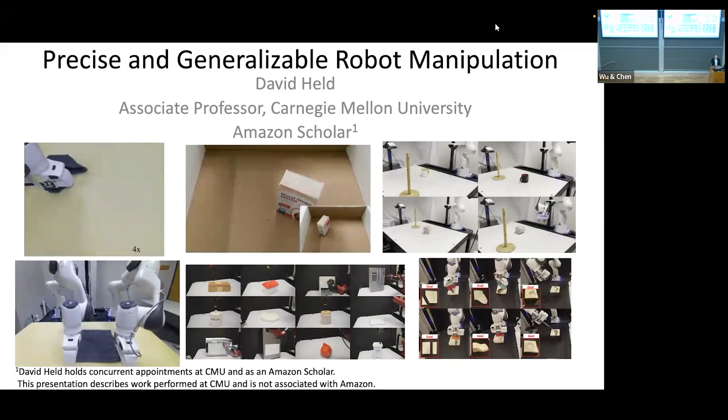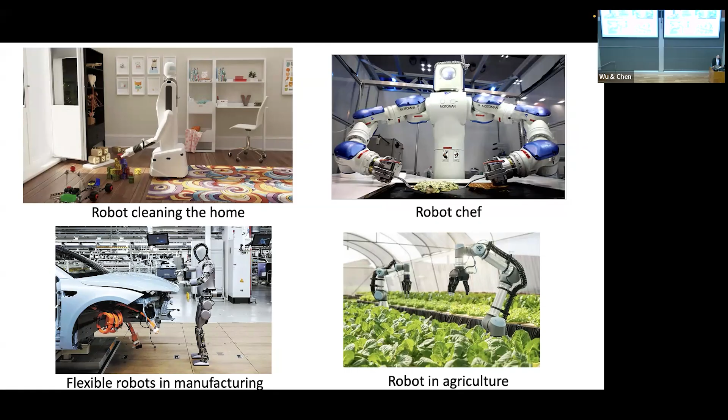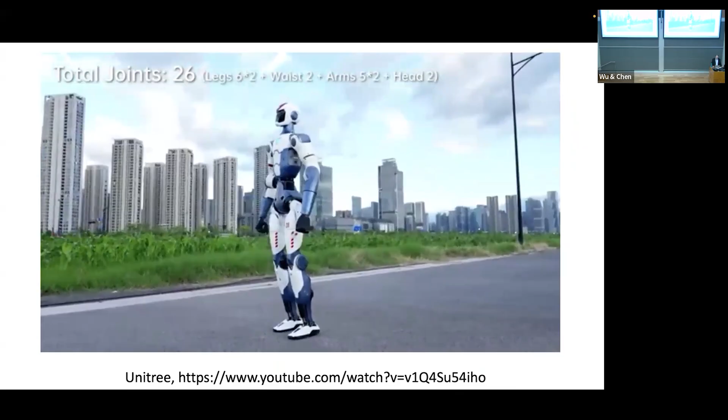As background, I guess many roboticists, probably many of you all, would like robots to one day work in our homes, cook food, do flexible manufacturing, adapt to new manufacturing tasks, work in agriculture, and many other complex settings. Now, if you look on social media or online, you can find many videos that look like this of robots doing super impressive acrobatics. And it makes it look like robotics is basically solved in some sense.

And you can actually buy one of these robots. And here's a video of someone who bought the robot. And look, it's already standing up and doing super cool things.

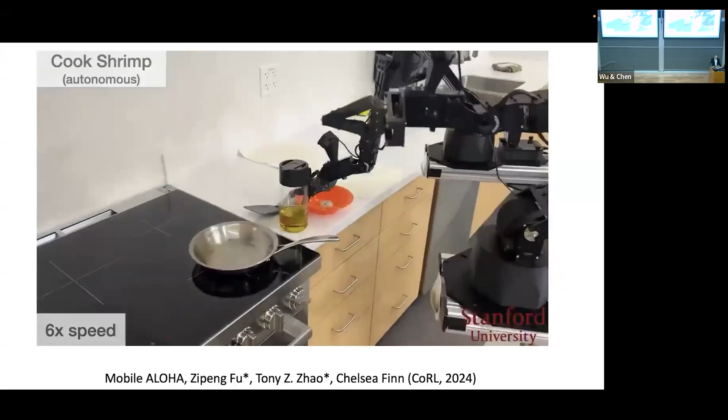That's awesome. Here's another video you can find online of a robot cooking. This is an autonomous robot from Stanford University, the Mobile ALOHA paper. That's great. You can buy one of these robots as well.

But you can't actually find very many videos of the robot that you buy off the shelf, put in your kitchen, and it starts cooking for you. It doesn't really work that way. So why not? Where is my robot chef?

So let's think about what the problem is with current approaches to robot learning. The most common approach to robot learning today is to take a large-scale robot dataset, such as Droid or many others, input that data into a vision language model that you can fine-tune with this robotics data. You can also add in some prior world knowledge about captioning images or things like that, and have the model output actions.

And here's an example of the robot doing a task. The task was to move the Coke can to Taylor Swift. This is from the RT2 paper from Google DeepMind. And if you watch this video, one thing you might notice is that it correctly identified which of these three pictures was Taylor Swift. Great, that's a very important thing for robots. Taylor Swift is amazing, we all love her.

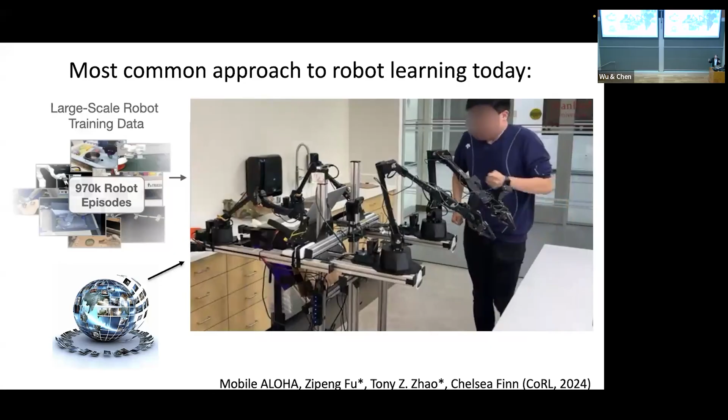But you might notice from the manipulation side, the Coke can was actually very poorly placed on the picture of Taylor Swift. It basically dropped the Coke can kind of nearish to the picture. And you can see many other examples of robots kind of roughly getting a sense of what they're supposed to do, but not actually doing it correctly or very precisely.

So a lot of robot learning research today has been pushing on this axis of generality—how can we make robots that can really understand everything in the world and have general world knowledge? And we've actually made a lot of success on that. Robots know who Taylor Swift is.

But on another axis, precision, maybe we haven't been able to get these foundation models to work in a very precise manner. On the other hand, we have specialist models, task-specific models trained and designed to only do one particular task. They can't do everything, but they can do one particular task well, like grasping. There are lots of models that are very good at grasping objects, but they're not very general.

So what we eventually want is models that can do both—models general enough to understand Taylor Swift and every other thing in the world, and that can do all your household chores, but with the precision of these specialist models that today can only do one thing. So how do we achieve both precision and generality?

We can look at the insights from both of these models and see what we can extract. From all the recent research in foundation models, we've learned that we want our models trained with large-scale datasets, expressive policies, and limited assumptions. If you do those things, you get lots of generality. Now, what insights do we get from specialist models that we can extract to also obtain high precision? Let's dig into that.

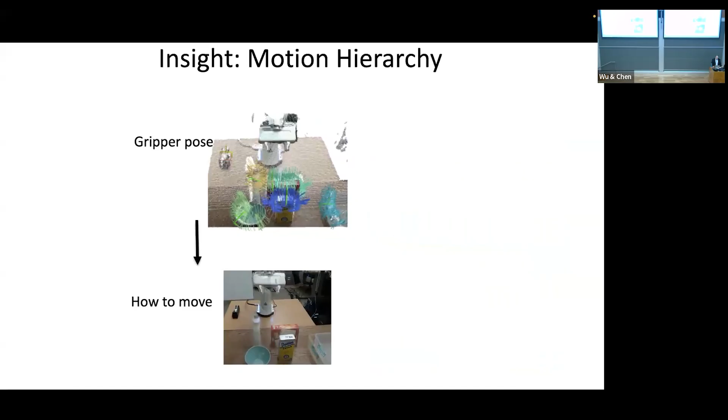You can think about this as a kind of motion hierarchy. At the high level, the robot does scene-level reasoning and predicts where the gripper should go next to achieve the task—in this case, the next location would be some target grasp pose. Then a low-level policy figures out how to move the robot to that place and do the grasping. Here, the low-level policy is basically motion planning and inverse kinematics, but you could imagine using a learned policy for this part if needed. So the main insight is this motion hierarchy: outputting a grasping pose at the high level, and the robot at a lower level figuring out how to move to that pose.

So the question I'd like to ask is, how can we take this insight to a more general set of tasks? I call this hierarchical motion policies, and I've applied it to a few different robotics problems that I can tell you about today.

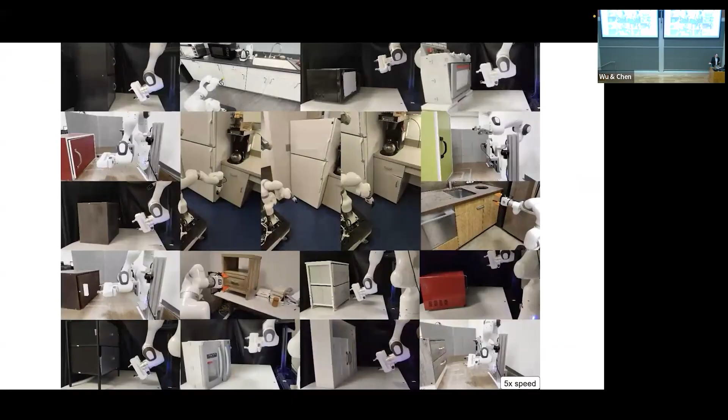I'm going to start with this project on articulated object manipulation. The goal is to enable a robot to manipulate any articulated objects—doors, drawers, cabinets, microwaves, ovens, things like that. This project is led by my PhD student Yufei Wang, who is currently on the faculty job market, as well as Ziyu Wang, who interned with us.

So how do we get a robot to manipulate all these articulated objects? The first step is we need some data to train on, and we generate that data in simulation with a fairly heuristic procedure. We sample a number of grasps around the handle of the object, do motion planning to reach the handle, and then use kinematics of the object to generate the opening action.

Not all of the demonstrations are successful—some of the grasps will fail—but it's in simulation, so we just want a big dataset. We filter out the demonstrations that don't work and keep the ones that do. That enables us to generate a dataset showing how a robot could open all of these different kinds of articulated objects.

Now, because we're in simulation, we have the advantage that we can randomize pretty much anything. We have a number of different objects that we're randomizing over. We can randomize the initial configuration of the robot relative to the object, and we can randomize the camera pose. Through this procedure, we end up with a data set of over 40,000 trajectories and almost 5 million observation action pairs.

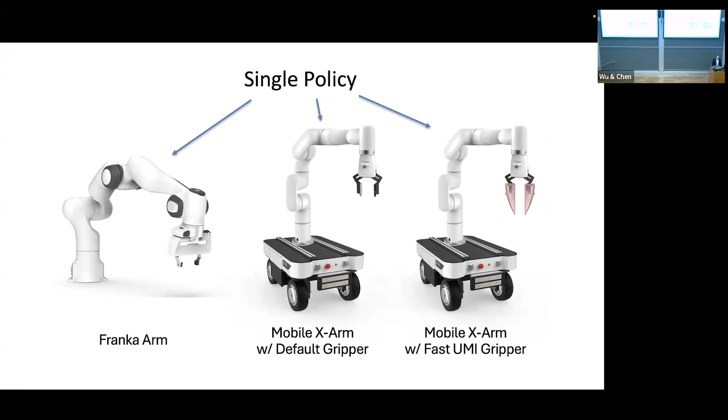So we end up with a single policy that we train in simulation, and we can deploy it on three different robot embodiments in the real world with different gripper types and things like that.

Here you can see the deployment in our lab, another lab in South Korea, and various kitchens and lounges around our building. You can see that it's able to open up all these different kinds of objects: dishwashers, fridges, microwaves, drawers, things like that.

Thanks, David. So this ability to predict the robot end effector pose at the end of the motion, that seems to rely, particularly for these kinds of objects, on judging the dimensions almost perfectly. It feels kind of brittle — if, for example, for the dishwasher, you judged its height to be just slightly different from what it actually is, you'd end up with a pose that's very far off, right? Am I intuiting this correctly?

We use a point cloud observation as input, not images. So the metric size of the object is directly part of the input. Does that address your concern? That mitigates the brittleness of requiring that we predict the final end effector pose correctly, because the height is directly part of the input itself.

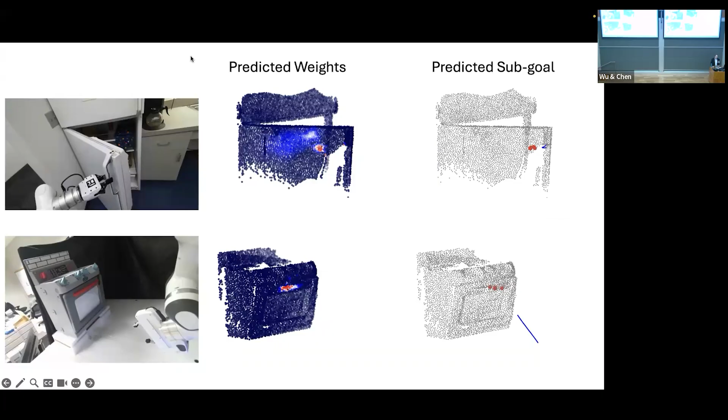So to summarize, the approach that worked very well here is starting with large-scale demonstration generation and simulation, a hierarchical policy, and then that enables zero-shot real-world deployment and cross-embodiment. Now, I'd like to also tell you about some, yes, go ahead.

I was wondering whether the high level generalizes to different low levels, and whether it can compensate for possibly a poor low level policy. Say the high level says go to this position, but the low level always makes a 10 centimeter error in the position it needs to get to. Will the high level learn to say, okay, that's a poor low level, I always have to say 10 centimeters more? Or are they very tangled?

No. Let me break that down in a bunch of different ways. First of all, in practice, the high level is trained just to predict the gripper pose in the demonstration, and the low level is actually trained separately. So the high level gets no feedback from the low level about what it should do. It's not trained in an end-to-end way, and it's not trained with reinforcement learning. It's just trained to imitate the gripper pose in the demonstration, so it doesn't have any way of learning to compensate for errors in the low level.

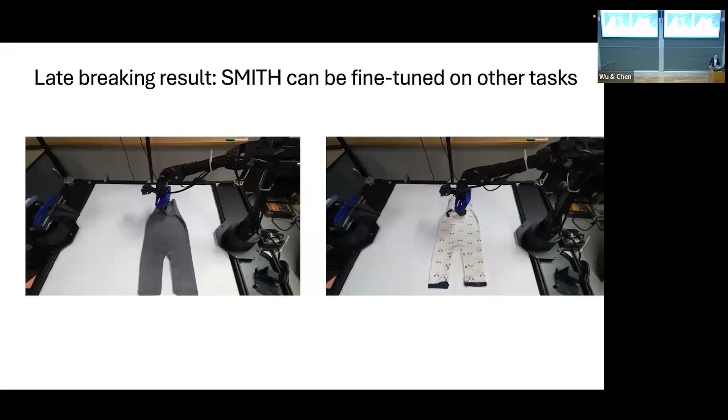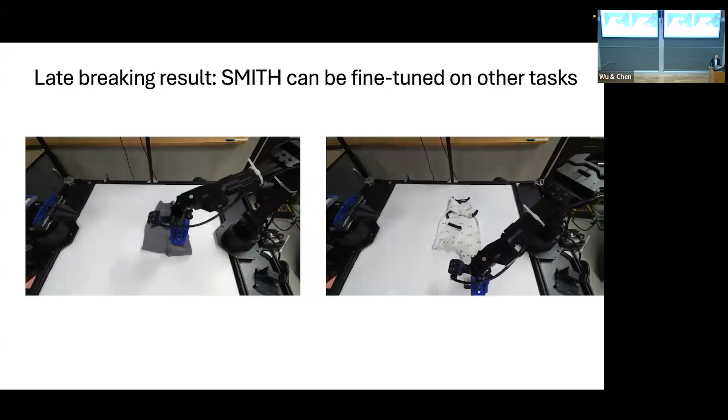So I don't necessarily want to claim that we have a generalist model. It's definitely not super general, but more that we have a structure that can be used for many tasks, achieving the same performance as models that are designed for just one particular task.

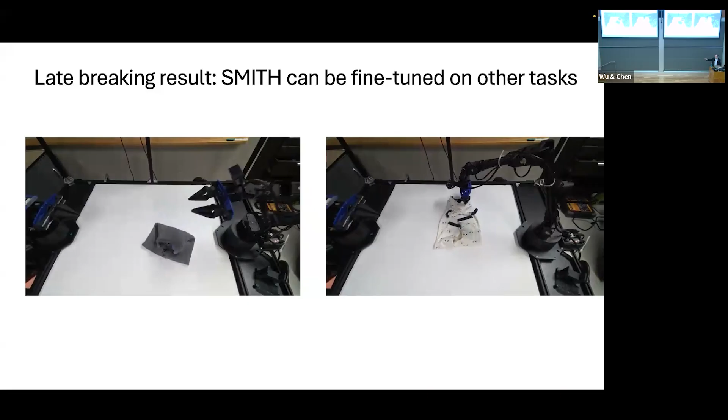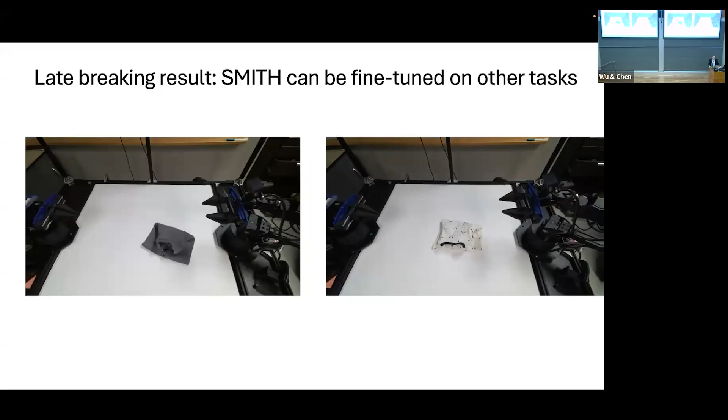Right. Good point, though. Great. Yeah. Yes. Yes. Yes. That's a great question. I have no idea the answer to that.

Basically the only axis we were pushing on here is, I guess, adding more objects within the scale, or pose variations, camera viewpoints. The number of objects for each of these tasks is quite large—it's 140,000 trajectories. But I don't really know what happens when you push it in the task dimension. That's a great question.

Cool. Any other questions? Yeah. Yeah, right. Of the keyframes. Yeah, that's a great point.

I think that's one of the remaining sticking points of this project: how do you define keyframes for a very general task? For these tasks it was easy—it was the grasping, whatever frame you grasp an object, then any frame you open the gripper, and then the last frame in the demonstration. But not all tasks would that make sense. If you are pushing an object, you might never open or close your gripper, but you might have a lot of motion with your gripper closed that is important to capture.

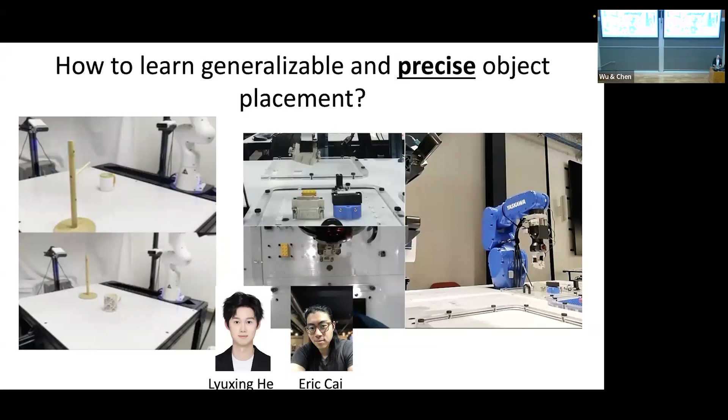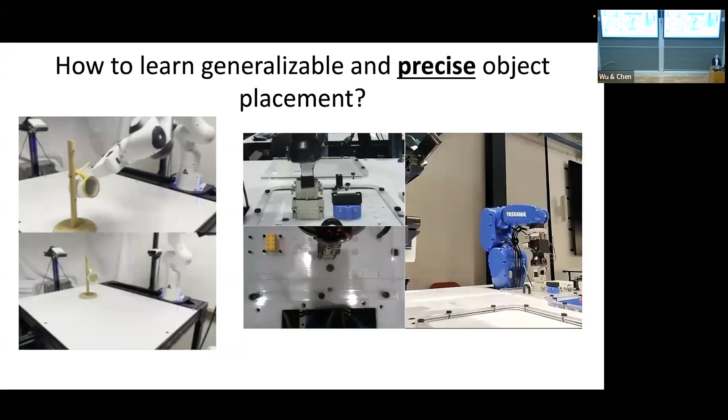For this task, we want to be able to do the two tasks shown on this slide, and many other placement tasks. On the left, we're showing an example from some of our lab's prior work on mug hanging, where we have to generalize to all different kinds of shapes and sizes of mugs, and different locations and poses of the mug rack. So it has to have some amount of generalizability to do that. On the right, we're demonstrating our method to perform this very precise industrial insertion task. This is the NIST task board, and it's a task that requires about millimeter-level precision. So how do we achieve both generalizability and precision for this object placement task?

We actually have a series of projects in our lab exploring different ways of doing this object placement problem. The latest version is this: basically what we do is take the point cloud of the object we're manipulating, and also the point cloud of the scene, and input them into a point diffusion model. This point diffusion model diffuses the points of the point cloud to the goal location of where this object should be placed. Then we feed it to either a motion planner or a low-level policy, depending on the situation, to figure out how to move the object into that target location.

Now, our initial attempts at this got kind of okay performance, but we found there are a couple of tricks you have to do to get this to work really well. So I'll describe what those are next.

The first one is that we had to disentangle the shape of the object and the frame. What I mean by that is we separately diffuse the shape of the object, meaning essentially you can think of this as like the pose for the case of rigid objects, in an object-centric reference frame -- we're diffusing basically the pose the object should have in the placement location. And then we also diffuse the frame of the object, which is essentially the centroid -- where the centroid of the object should be. If you add these two things together, you get the predicted location for every point in the point cloud back in the world reference frame. That's the first thing that we found led to much better performance.

In terms of results, for the NIST insertion task we have the scene point cloud, which is the NIST board, and the object point cloud, which is the plug we're inserting. We diffuse both the shape of the plug and the location of where it should go, and here you can see the combined diffusion in the frame of the NIST board itself. Our output is that we can then very precisely perform this insertion task.

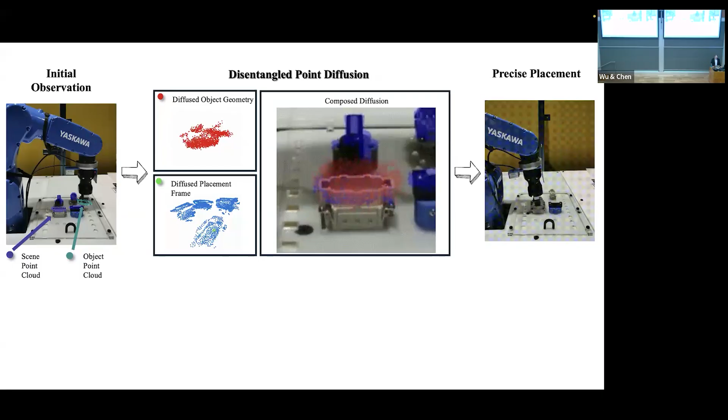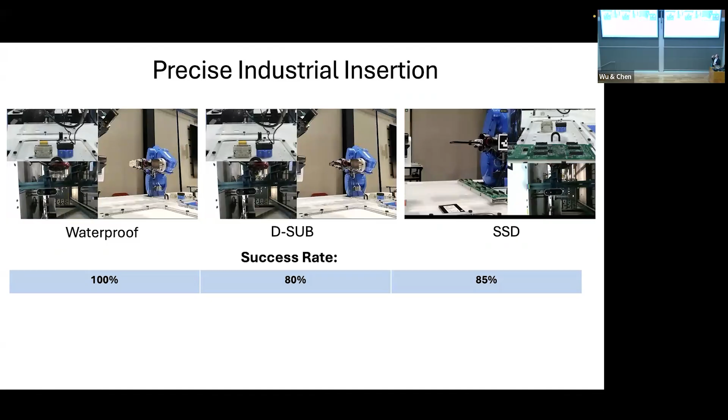We tried this on the three different plugs in the NIST board: the waterproof connector, the D-sub connector, and the SSD connector. You can see our success rates on each of these tasks ranging from 80 to 100%, even though these tasks require about 1 millimeter precision and around 1 degree of accuracy. These are just approximate numbers.

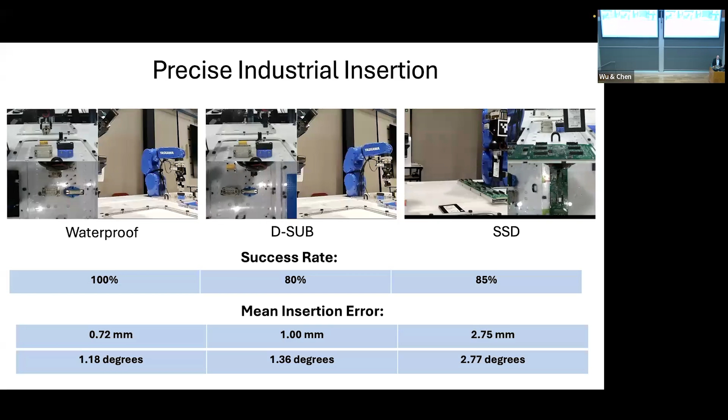Our method can also be used for tasks that require some amount of generality, like hanging different kinds of mugs on different multi-peg racks, inserting different books very precisely into a bookshelf between other books, or placing a can in a specific location in a cabinet. Since this is a diffusion model, you can run it multiple times and get different types of placements.

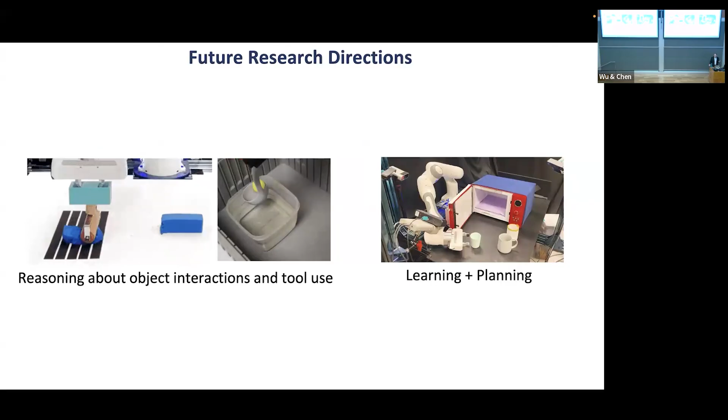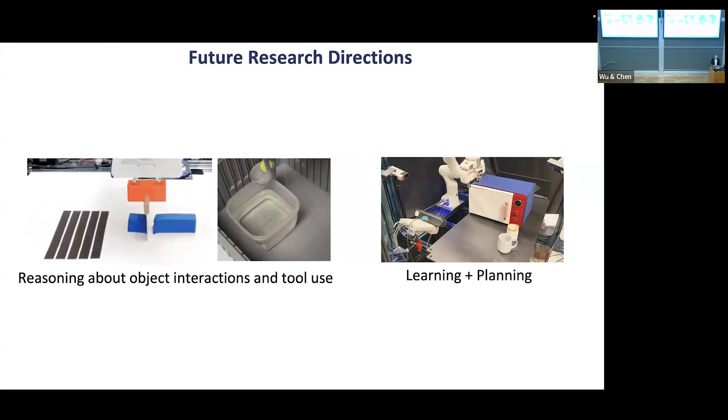Some future things I'm interested in are reasoning about object interaction and tool use. If a robot has to perform some tasks requiring different tools in sequential order, it would be interesting to enable robots to reason about how to do these tool use tasks. I think there's also much more to explore in the learning and planning direction.

I'd like to acknowledge the fabulous students and postdocs I've had the pleasure of working with over these years, and also my various funding sources. I can end here and take any remaining questions people have.

Thank you very much, David, for a very inspiring talk. Let me maybe kickstart the questions at the end by asking something that's been on my mind throughout.

When you have this modular structure to your policy, it feels like one advantage is that these modules could be drawing from different data sources. In line with our conversation yesterday, the high-level policy could be trained on more data or something like that, but that hasn't really been the argument in your line of work. So broadly, is there a reason to believe that just having the structure is already really helpful?

Is it just kind of an inference-time trick where you keep this high-level motion as a grounding factor for your low-level policy? And do you think you might even get better improvements by exploiting other data?